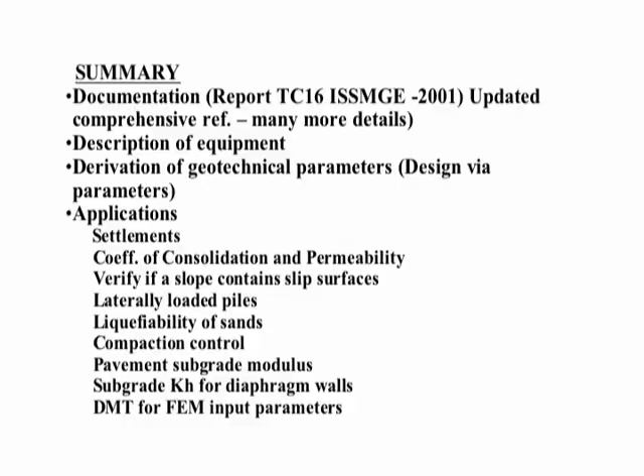Then we shall talk about the specifics of some applications, in particular settlements, which is probably the application number one of this tool. The coefficient of consolidation, permeability, to verify if a slope contains slip surfaces, laterally loaded piles, which is the original reason why this instrument was conceived. We shall talk about the liquefiability of sands. I think we have today quite a heavy contribution on liquefiability, and this will be presented by my colleague Monaco and by Professor Maugeri tomorrow afternoon. There is a paper in the proceedings which is more or less a state of the art of what we know today about evaluating liquefiability of sands by DMT.

A few words about compaction control, about pavement subgrade modulus to check the compaction of the subgrade under pavements. Something about the springs for diaphragm walls, because of course when you have to design diaphragm walls, you would like to know what springs you have to use, and this is a contribution in this direction. And then we shall say a few words about if and how DMT can help for selecting finite element input parameters.

Key references, I think most of you already know, but the important standards are the Eurocode 7 and the relatively recent 2001 ASTM standard.

As manuals, I remember the first manual that we made in Gainesville with David Crapps, that was in '81, which is now absorbed by the later manuals. Also, Dr. Schmertmann made a very heavy contribution in 4 volumes, which are not easy to have available, but are a very good source. But much of the material of all these manuals has been transplanted into the TC16 report.

The last 3 with the arrow here are perhaps what we still have to use today. Maybe the last 2 in particular. All of them are anyway in this bibliographic site that I started 3 or 4 years ago, and from which you can download almost anything, in particular these 3, and these 2, because I think this is really the basic reference.

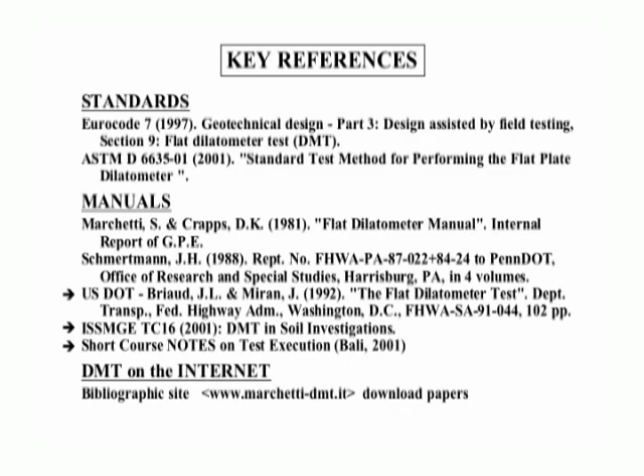But if you want to have details on instrumental details, you can go here. This is like a manual containing many details on the mechanics of the instrument, but we don't want to go into these details this morning. But if you're a user, this can be quite helpful.

And when the two things are equal, the membrane lifts and the contact is no longer a contact, and you take the pressure reading this time. Then you inflate and take the pressure reading when you have inflated 1.1 millimeter. Maybe I can tell you the story of the 1.1, but anyway, this is the way it is today.

The push force can be provided most efficiently by a penetrometer or by a drill rig, which however are not so effective, or almost any other equipment, because the test is not pushing the soil, but dilating the membrane. So you can more or less install with every possible method.

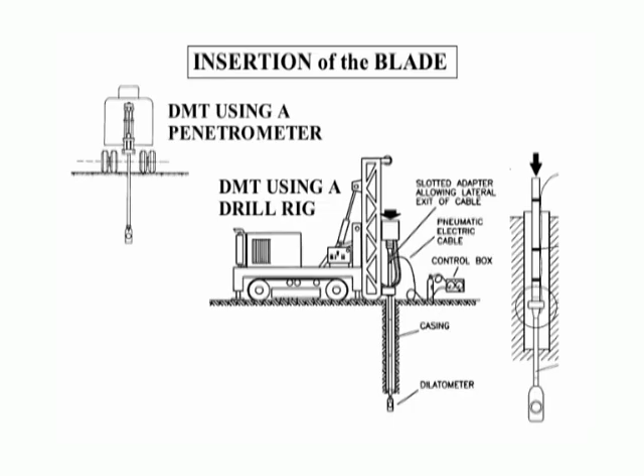As I said, the most effective way is using a penetrometer, possibly a 20 ton penetrometer, in which case it's better to have stronger rods than the typical 36 millimeter rods, because otherwise you have 20 tons but you have to stop because you're in danger of losing your instrument. I've seen many people having a 20 ton truck and then they stop because of the rods. So we prefer to use 43 millimeter rods, very strong, so we can apply all of the 20 tons.

Otherwise, you can use the push force of a drill rig. And sometimes, this is what we prefer, when we have a drill rig, we use the torpedo configuration, in which the idea is to avoid threading the cable all the way in the drill string, but only in the last, say typically 3 meters. Then the cable exits laterally and goes up in the annular space between the rods and the casing.

Here you have some pictures. It's important to have a collar, a slotted collar, through which the cable can go, so it can be protected in case there is some contact with the casing. As you can see, this is actually a 6 meter torpedo. As I said, it can typically be 3 meters, but in this case it was 6 meters. And then the cable exits laterally here. So you pre-assemble the thing beforehand.

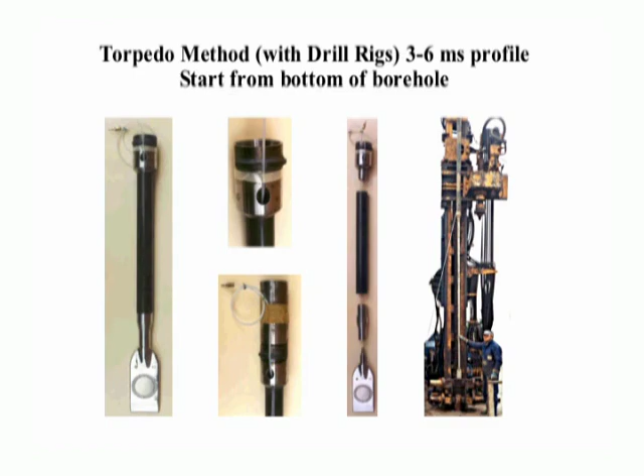It's like an SPT, and you attach it at the bottom, at the end of the drilling rods, which of course are more robust than the torpedo, because the torpedo typically is 36 or 50 millimeter diameter. The drill rods are typically 3 inches. So buckling is less of a danger.

Of course, by this method, you get every time only 3 meters, a stretch of 3 meters of profile. Then you have to clean the hole, extract the tool, clean the hole, advance in the penetrated soil, and start again from the bottom of the borehole in the virgin soil to make an additional 3 meters of testing.

This particular method is a necessity when you are at sea, because, as I just said, you can push on the drill rods, which are rather robust, and this can avoid buckling, but then all the force goes to the torpedo, which is smaller in diameter.

The soils that can be tested by DMT practically are all the penetrable soils. Often the limitation is not the DMT itself, but the push capacity, because the blade itself is very strong and can withstand more than the capacity of common trucks. Since the method of measuring is the balance of zero, the resolution is quite high and depends on the resolution of the pressure gauges, really.

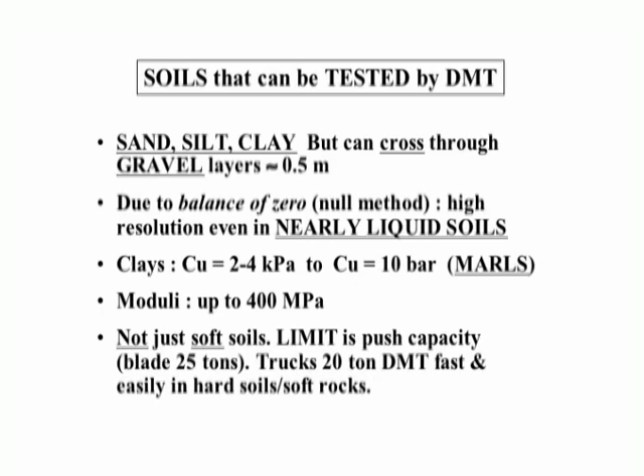So we can get results even in nearly liquid soils, which means that in clays, CU values can go from nearly liquid material to nearly marl, and the moduli up to this value indicated here. Of course, gravel is not welcome. Sometimes if the gravel does not tear the membrane, you can cross half a meter, even 1 meter of gravel, without taking readings, because readings have significance only if the soil particles are a small fraction of the diameter of the membrane.

Most of you probably are familiar with this picture illustrating the working principle. I don't want to go into details. I just want to say that everything here is mechanical, so the operator cannot calibrate or adjust anything. He cannot make any damage or personal touch.

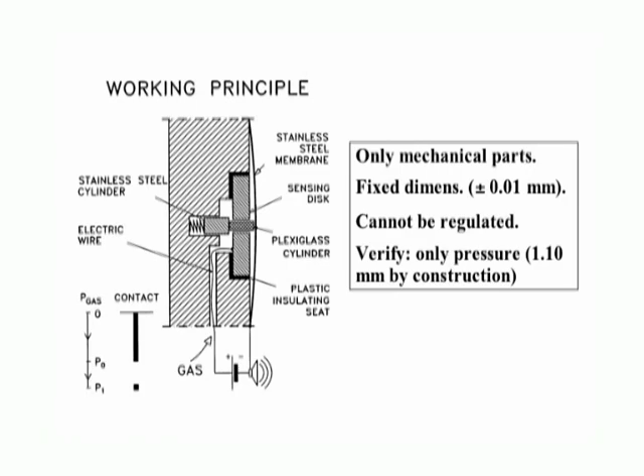There is no way that it cannot get 1.1 millimeter. So, as I said, the dimensions are fixed. 1.1 is the difference between the height of this plexiglass cylinder and this sensing disk. The difference is exactly 1.10 millimeter. So the extension, the movement of the membrane, is very well defined.

This is important because from the verification viewpoint, when you need to verify or make quality controls, you just need to verify the pressure measurement, because the only measurement is pressure. There is no way you can get out of calibration for the settlement, for the deformation of the membrane.

Often, I don't know in this country, but in our country very often bureaucracy requires that when you use pressure gauges you send them to universities to calibrate, which is a very ritual situation. In our case, since we have two gauges, one checks the other, and this is a sufficient check. We never had problems with the two gauges.

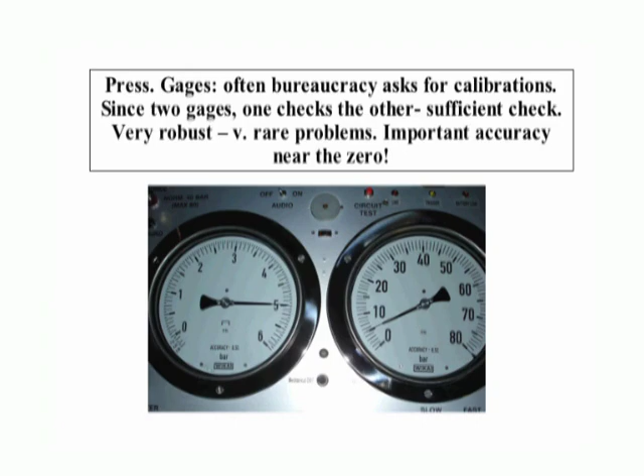So if the second reading is within a few percent from the first reading, you are right, and in my opinion, the calibrations that might be asked by the bureaucracy are superfluous. What really counts is the accuracy near zero, and not really the accuracy, because even some nonlinearity is not important at all. What is important is the resolution and the repeatability, not the accuracy.

But all these are already built in, because as you see, the initial part of this gauge is exploded here, so the reproducibility and the resolution are very high. So many of the problems behind this are not seen by the operator, by anybody, because they really do not exist. So the calibration can be done, but I think it's just for bureaucratic reasons.

Reproducibility of the DMT is, everybody who has done a DMT knows that it is very reproducible. Even more than reproducible, I would say independent from operator. One of the things I have always disliked since the beginning of my career was when I got results from some in-situ test I don't want to mention, and people told me, but these are made in a country in which they are not so accurate. So if it is a moving target, no good. So I think every operator should get the same results.

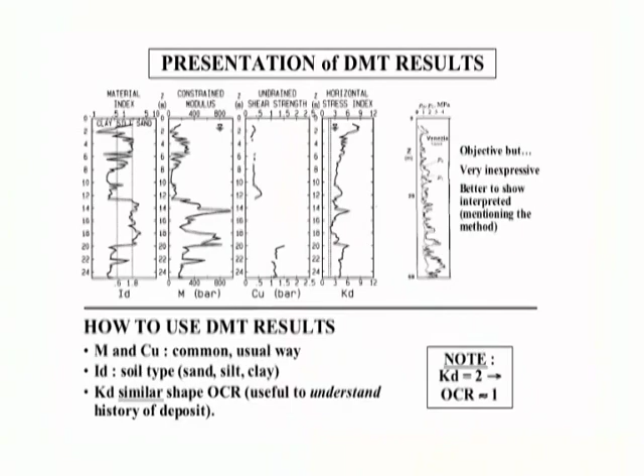So though KD, which is correlated to OCR, is not used directly in normal foundation calculations, however, OCR, we know, dominates soil behavior. So since KD is very similar to OCR, this parameter gives you a look at the stress history.

Some people prefer to display these results in this way, which is only P0 and P1. I strongly dislike this way of presenting the results, because they say it's objective. It's true, this is objective, this has no interpretation, but it's completely incomprehensible for anybody. It's like if you gave the results of the oedometer without showing the curve - more objective, but

inexpressive. I think a proper way is to show it this way, maybe even adding P0, P1 if you want, and of course stating the method by which you have interpreted P0, P1.

How to use the results? M and Cu we use in the common usual way. ID soil type is nice to know if the material is sand, silt, or clay. Though this is a nice extra, the tool was not done for this. As I said, KD has a similar shape of OCR, and it's important for some applications that we shall talk about later to keep in mind that KD equal to 2 means approximately OCR equal to 1.

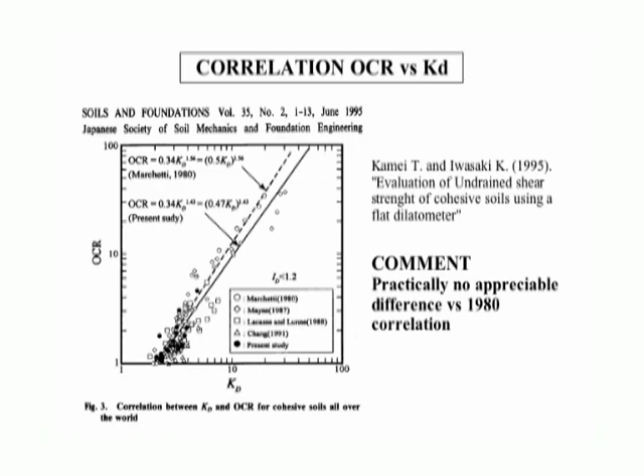Well, actually, this collection of OCR results made about 15 years after the initial 1980 correlation by some Japanese, and they found, collecting all the available OCR, a line which practically was coincident with the previous line. So what this slide tells us is that subsequent research has found that the initial correlations were essentially adequate.

This has some interest because it's a comparison between the curve that we have just seen in the previous slide, obtained by calibrations, OCR, KD. But here we have a theoretical prediction made by Finno, quite some time ago, by a strain path method and the anisotropic bounding surface model, which is a model I don't know if you are familiar. I'm not particularly familiar with that. Anyway, he found these bars here from his theoretical study.

So this is a case in which, again, sometimes the calibration is the most expeditious way when the mathematics is not ready, provided, of course, the physical link is there. So this is a confirmation by theory of something that was calibrated in absence of the theory before.

These are CU by DMT, which is the continuous line. These are CU by, let's say, high-quality triaxial samples, because this was Kiso-Jiban, which is one of the biggest firms in Japan. And frankly, my opinion is that if there is this scatter, this is the scatter of the triaxial, not of the soil. But anyway, the general agreement you can see is correct.

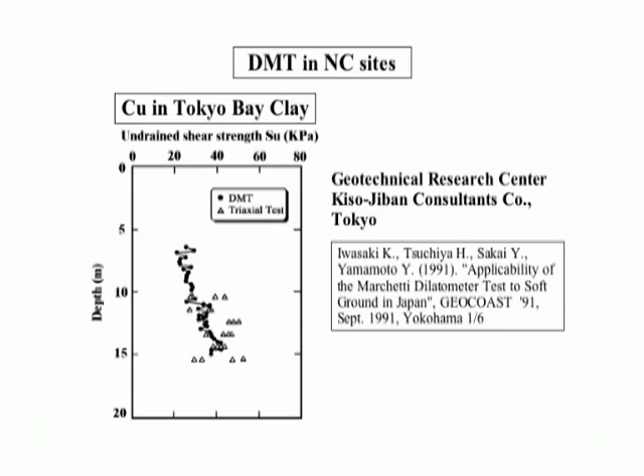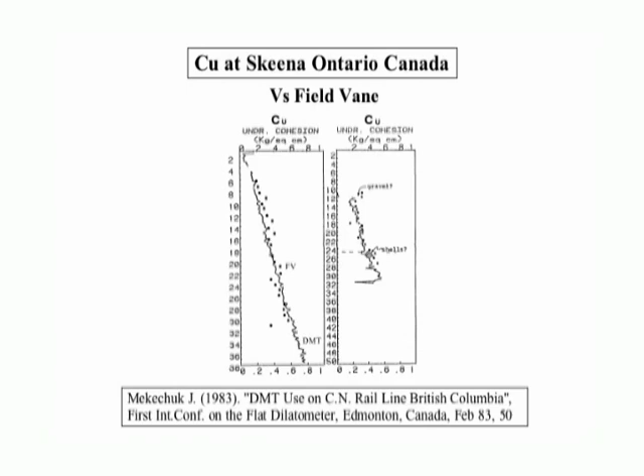Maybe I have not mentioned, but all these black lines representing DMT have always been interpreted in this context by using the 1980 correlations. So there are no adjustments or corrections, always with the 1980 correlations, which give you just one value of CU. Next.

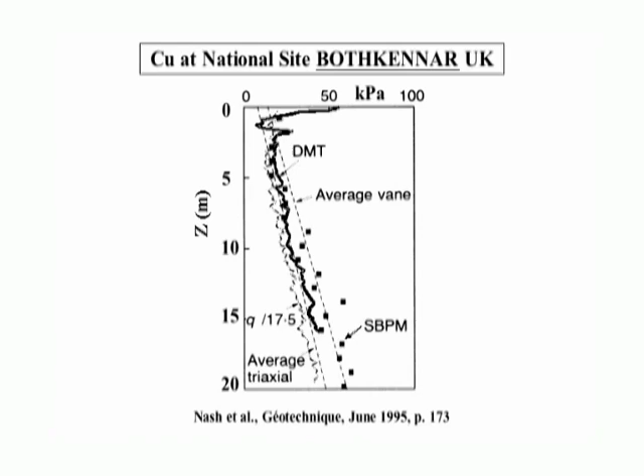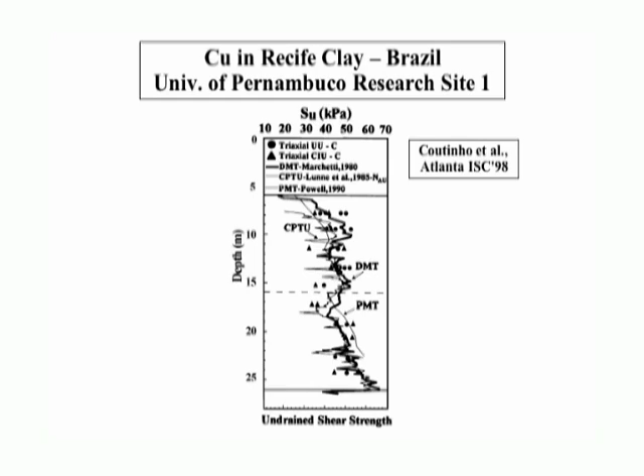When you want to check things, you have to go to different places. So these are results in other places between vane and CU, and again the agreement is good. And here is our friend Roberto Coutinho, who did this test in one of his research sites. And again, DMT is in agreement with other results he got.

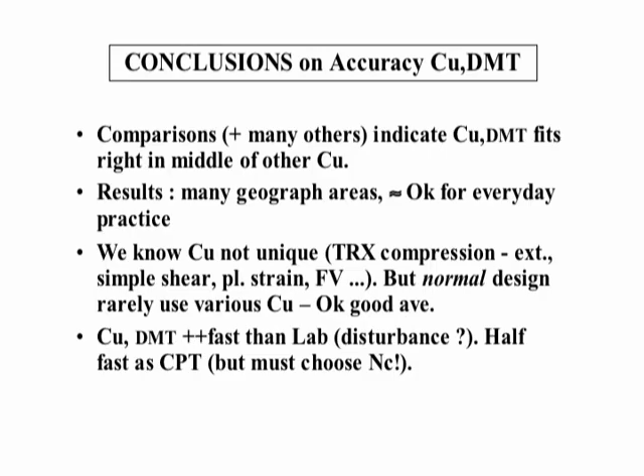So the conclusion on the accuracy of CU is, and many others indicated, that generally CU is okay for everyday practice and works in many geographical areas. Of course, a purist could say that we know that CU is not unique because we have triaxial compression, extension, simple shear, plane strain, field vane. But how many of us use more than one CU in everyday design? So we think that having a reasonably accurate CU value is already something.

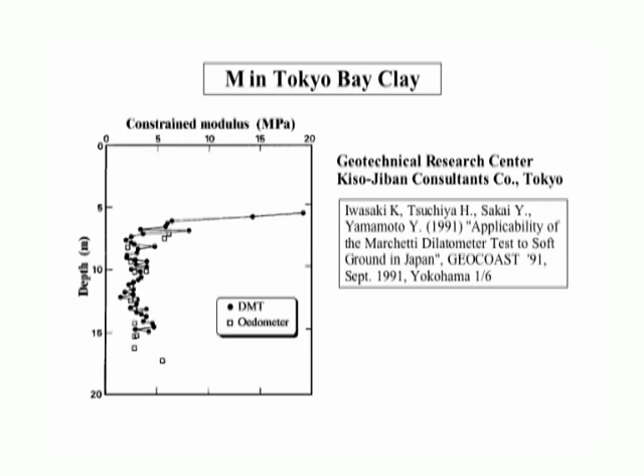This agreement by the same people at the Kiso-Jiban firm. These are the results in another clay.

Now, what we think is the most useful DMT application is the settlement. And what we recommend, or what we use at least, is the one-dimensional method in which you have M given by DMT. So you have no choice if you use this method. And the delta sigma V by Boussinesq. Again, you have no choice because Boussinesq is Boussinesq. And this is the formula, the one-dimensional Terzaghi formula.

If you really want, you can use, of course, the three-dimensional formula, Hooke's law. There is a relation, as you know, between Young's modulus and constrained modulus, which from typical Poisson ratio values gives about 0.8. But you get similar predictions because this is lower, but then you have to detract something. So this formula and this formula are nearly equivalent so far as the quantity you obtain.

But the point is this formula is simpler, not just for simplicity, because you cannot play games with the results. Here you can have a different Poisson ratio. You can have this conversion with a different Poisson ratio. We also know that the horizontal stresses are not so well predicted by Boussinesq.

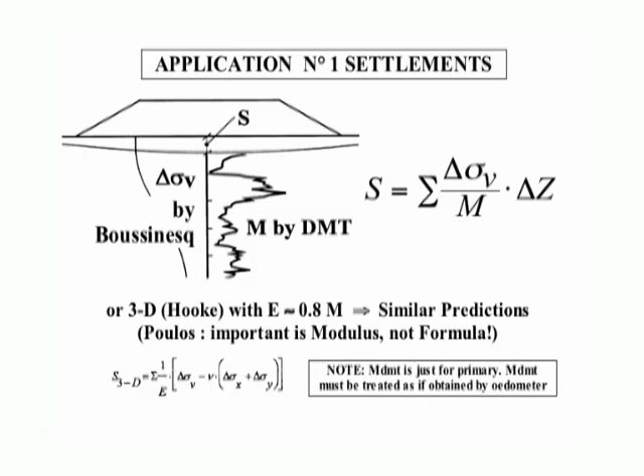One note, this settlement does not include secondary. As was stressed in many previous documents, MDMT is just for primary, because of course during the test you have no time for secondary. And so MDMT must be treated as if it was obtained by oedometer.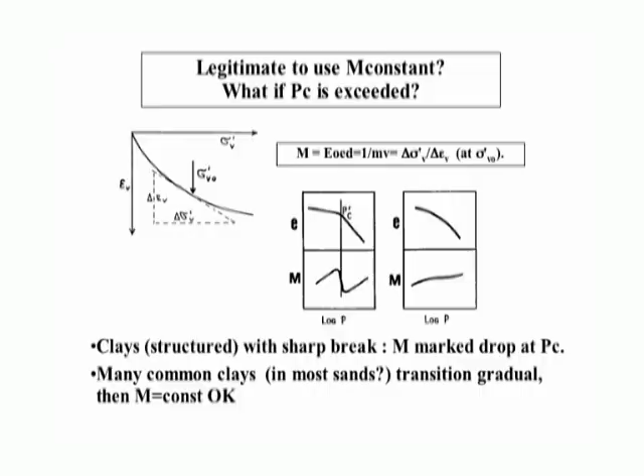Now a question can be, is it legitimate to use M constant in the settlement analysis, because as we know, M is a variable, is not a constant during loading. M is defined here, is 1 over mv, but is at the vertical overburden stress. And we know that if we have a sharp break and we are exceeding PC, M has a sharp drop and then starts again. So can we really use a constant value of M?

Well, this situation with a very sharp break is generally so sharp in some structured clays, some Scandinavian clays, but in many clays may not be so sharp. And probably even in most sands, there is no such break. So the transition is more gradual. So in many cases, this break is not so marked, and the transition is more gradual. And in practice, we can use M in many cases.

As I remarked in the previous slide, Poulos clearly said in Istanbul something we all know, that what is important is not the formula, but the modulus. What is important is to have a modulus which is not 3 or 4 times wrong. This is important. The rest, the formula, is not so important. And even accepting that this can be considered a constant is not so terrible compared with errors that you can make by different methods.

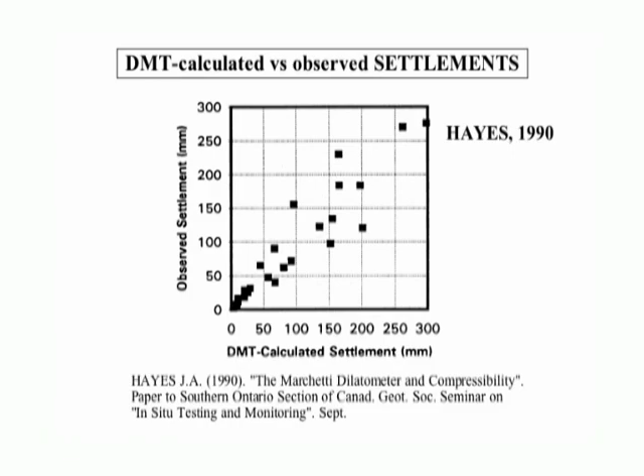I don't show, of course, case histories here because, for many reasons, we have no time, but there is a specific paper in this conference that has collected quite a large number of predicted versus observed settlements, a review of the available experience by Monaco and other people of our group. So if you are interested in comparison between predicted and observed settlement, you can go to this paper in the book of this conference.

We might wonder why it appears that the DMT is better in getting settlement than other tools. Well, Jamiolkowski, as far as the ratio Young's modulus over QC is concerned, found in the calibration chamber quite a high variability, between 2.5 and 25. And this was a function of OCR. But of course, the question is who will give us OCR? Because if we just have QC, we cannot use at the same time QC to infer OCR.

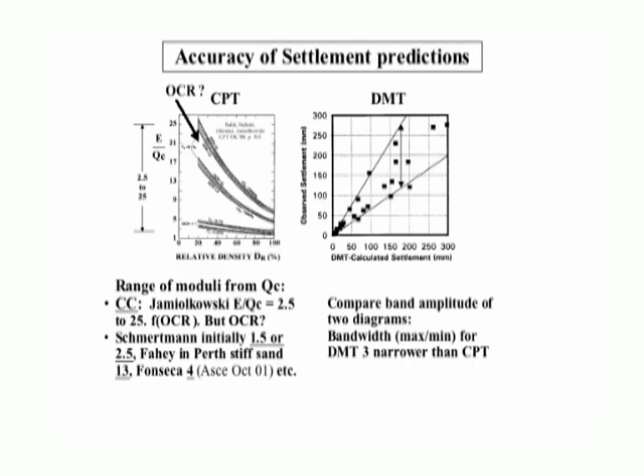Here the bandwidth of maximum to minimum prediction, these are settlements really, not moduli, but anyway it is the same thing, is much narrower. This is another slide presented by two persons who are in this room, Bullock and Failmezger, and they showed again the predictions made by SPT and by DMT, measured versus predicted. You can see a much larger dispersion by SPT than by DMT. Sometimes people say there is a lot of experience with SPT, but even if you have a billion measurements, this is not going to reduce the variability.

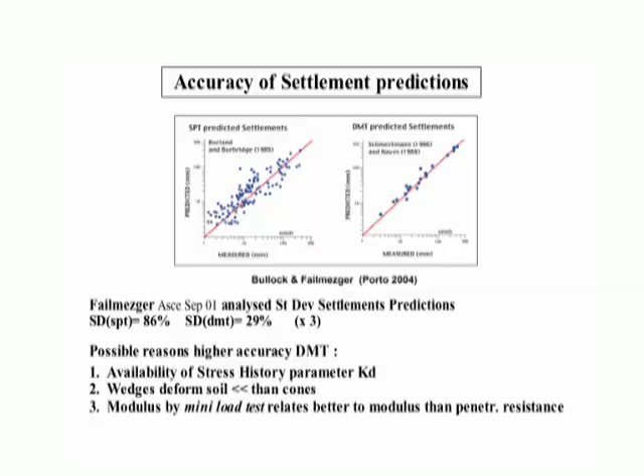Possible reasons for the higher accuracy of DMT, we think, are first of all, in my opinion, the availability of the stress history parameter, KD, which is connected to OCR. Stress history is very important to control settlements. Then, of course, a wedge deforms the soil less than a rupture test. And then the modulus by a mini load test relates better to modulus than a penetration resistance, because actually what the DMT does is like a lateral embankment against the soil. So this is more similar to a modulus than the penetration resistance.

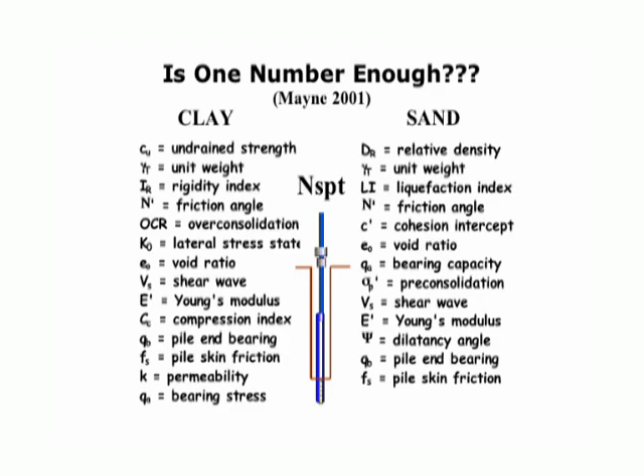This is a very nice picture that probably Paul may recognize. Is one number enough? Because in 2001 he said, we measure SPT, and then from this we want to obtain the shear strength, the modulus, skin friction, etc. So one number is not very much, of course. Actually, we should have 36 numbers, because a stress has 6 components and strain has 6 components, a 6 by 6 matrix of 36 parameters, which vary as you load. But 36 is not so easy, but one maybe is too little.

DMT is a 2-parameter test, and permits some elementary form of combination in which you get MDMT, as I said before, correcting ED obtained by theory of elasticity by soil type and KD. And here, this line emphasizes that one of them is stress history. And as was mentioned by Jamiolkowski in one of the penetration conferences in '88, without stress history it is impossible to select a reliable modulus, E or M, from QC. So stress history is fundamental.

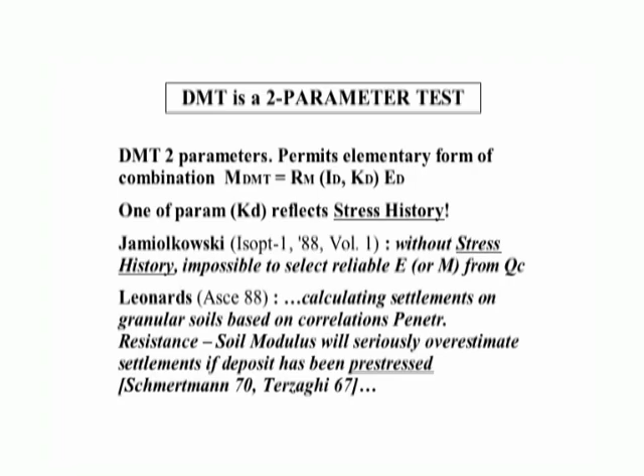And also Leonards: calculating settlements on granular soils based on correlations between penetration resistance and soil modulus will seriously overestimate settlements if the deposit has been prestressed. So prestressing has a fundamental role in reducing settlements. Therefore, it must play some role when you predict settlements. So having a modulus which incorporates the effect of stress history is in the right direction.

We have seen many times this picture, but remember this is now more than 30 years old. These photographs were done by Baligh and Scott, and were in the clay, in the real thing. They are not numerical models. This is the real clay, and we have both cases. We have distortions, but you see that here we have something like a clay juice in the place where you usually put the porous stone for dissipations.

And we know what the soil does when you make clay juice. Well, this is a classic, a particular case of the Leda clay, but you know that the Leda clay, you can put a lot of weight on it, but if you make something like this, then you can put it in a glass. So this is okay for rupture, but when you're looking for deformation or stiffness, perhaps you are in a better condition if you are loading a bulb of soil here, which is distorted, but not in a way comparable with this one.

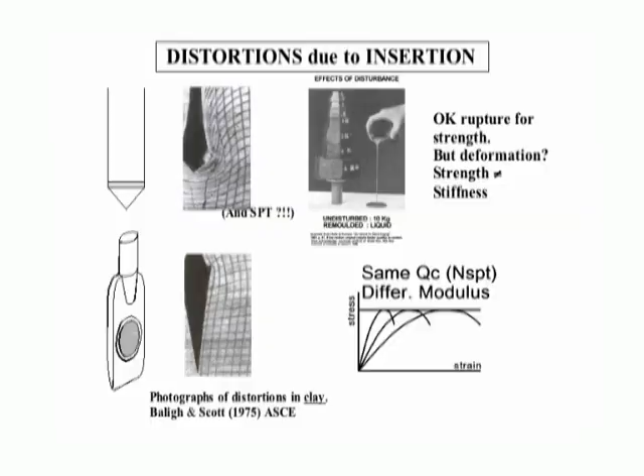And this is a picture that was also by Paul Mayne. He insists with his students that of course deformability or stiffness and strength are not the same thing, they are two different properties. You can have in the stress-strain curve the same strength, but you can have a different slope for reaching that strength. On the other hand, this is like steel. All steels have more or less the same modulus, but the strength can be much more different. So these are two different properties. So strength is one thing, deformation is another thing.

Another thing I want to clarify, maybe not here in this audience, but sometimes many people confuse the DMT with the pressuremeter. So I think there are considerable differences. I like penetration testing for reasons I already mentioned. The operator cannot make damage, because you have to make PMT in a pre-drilled, calibrated, this is a terrible word, in a calibrated hole. Now, if you are in clay, you may have a calibrated hole. What is a calibrated hole if you are in sand or with water, etc.? So the big difference is that the operator can do damage. Not only the operator, maybe the soil itself does not permit to have a very good hole.

And another point is what you do as a first action in a pressuremeter, you destroy the horizontal stresses, because when you make a hole, the horizontal stresses are reduced to 0, which is a trivial number that you cannot use. When you penetrate with the DMT, you increase the pre-existing horizontal stress, but at least you can make a correlation because you have something which is not trivial. So you can go from KD to K0 and these kinds of things.

I think with all cylindrical probes, you have this problem. And again, though I'm not familiar, I think with the cone pressuremeter, one of the reasons why it did not go very fast is that in this zone you are behind this parasitic ring. But of course, we don't want to go into this.

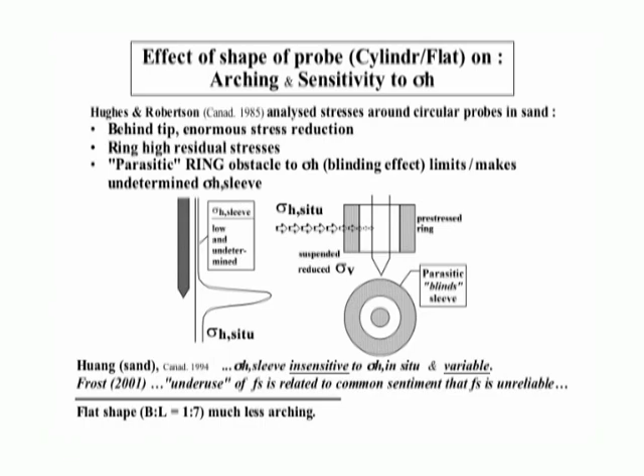I just want to conclude here that a flat shape implies much less arching, because the cross section of the DMT is about 1 to 7. For instance, would you ever make a tunnel with the shape 1 to 7 vertical to horizontal? Never, because you would not have arching. So you try to have it circular or elliptical, but never of this shape.

So we think it is reasonable to assume that with the flat shape, you avoid the problem of arching that we have just seen. Often DMT has been used for before-after. DMT before-after is used to control compaction, because of course when you compact you increase the modulus.

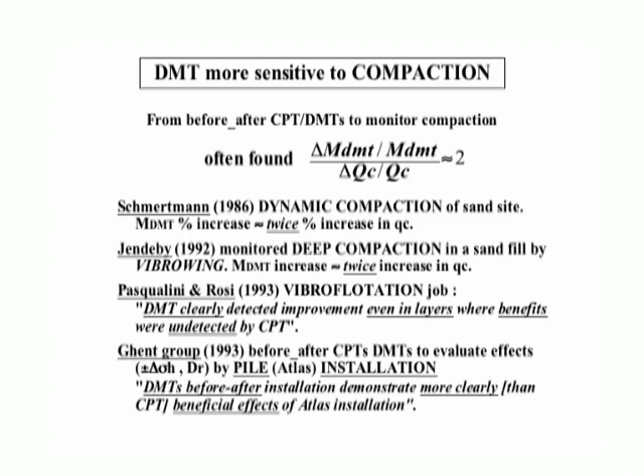DMT has been found to be more sensitive to compaction than other tests, because many researchers have observed that when you compact you have an increase both of QC and DMT, but DMT increases at a faster rate. So if the increase in QC is 10%, you find that DMT increases 20%.

Schmertmann found this in 1986. There is an important paper from him, dynamic compaction of a sand site, and he found that the increase in M was about twice the increase in QC. These people in Scandinavia found a similar result. This found similar results, and the Ghent group also, studying the effect of the installation of Atlas piles, noted that DMTs before-after installation demonstrate more clearly than CPT the beneficial effects of the Atlas installation.

So we think, as Roger said before, that it is important that DMT is more sensitive to even delicate effects in the soil. Well, this more or less repeats the previous slide. It shows that before compaction, you have a QC and an MDMT, let's say. After compaction, both increase, but QC increases a little, MDMT increases a lot.

And the ratio of this to this also increases, because before compaction, when the soil is nearly normally consolidated, you have a ratio of 5, 6, 7. After compaction, when you have imparted stress history to your soil, this can be 20, 25.

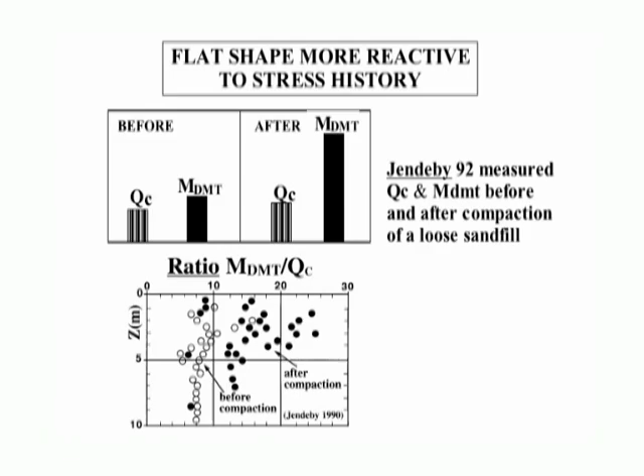Using DMT for compaction can have some advantages, because since QC is scarcely sensitive to sigma H, QC reflects only part of the benefit and does not reflect the increase in delta sigma H. And according to Massarsch, the settlement predicted by QC after compaction can be too big. The consequence is we compact more than necessary.

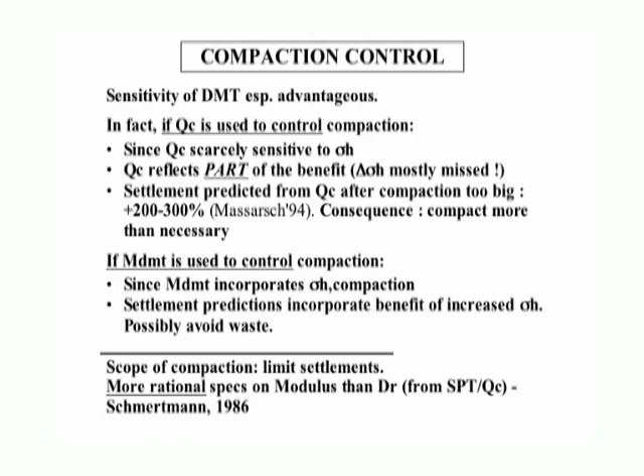If we use MDMT to control compaction, since MDMT incorporates sigma H, the settlement predictions incorporate the benefit of increased sigma H. And in this case, we could possibly avoid waste. In other words, by DMT it seems that we can feel the advantages of increasing sigma H. So it is a more direct link to the settlements.

And I think a very appropriate observation by Schmertmann in '86 was: why do we compact? We compact to limit the settlements. So it is more rational to write a specification in terms of modulus rather than DR. What has DR to do with our scope? The real scope is to limit settlements. If you want settlements, go directly to modulus, rather than pass through relative density.

We have seen two slides ago that the ratio MDMT over QC during compaction increases from 5 to 10, let's say, to 25 to 30. Now, during compaction of a loose sand fill, this ratio alpha increases, but compaction means imparting OCR and stress history. So alpha is usable as an approximate indicator of OCR.

This could be one of the few ways to estimate OCR in sand, because when we find a value of alpha of 5 to 10, this means normally consolidated sand. When it's in the other range, it means overconsolidated sand. And of course, from OCR, we can also have an indication of K0 in sand.

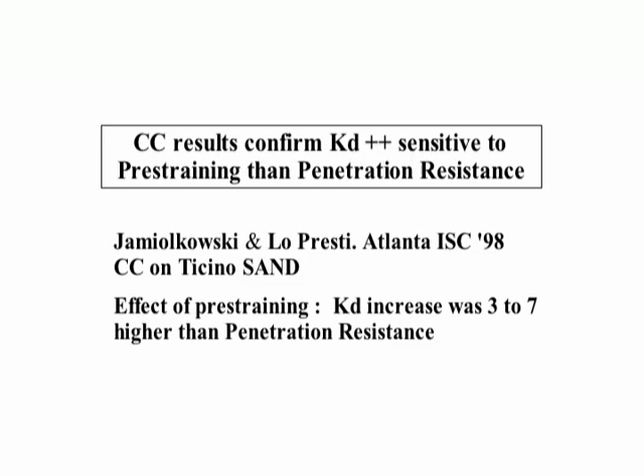They show essentially that if you pre-strain the sand in the calibration chamber, KD increases much faster than penetration resistance. Pre-straining is an effect not easy to detect by other methods. It's like aging, more or less - a tenuous form of aging.

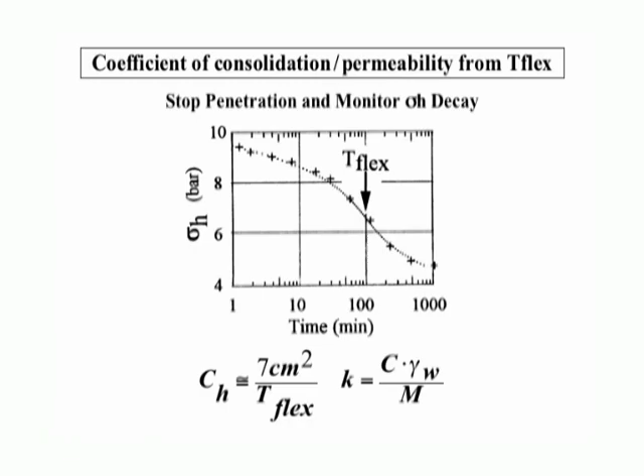This number 7 was obtained again as a number connecting to theory, because the theory is missing for what you want. The theory actually exists, for instance, for the pressure meter, the holding test - you know the holding test, and Anderson developed the theory for the total stress decay. But DMT is not circular, it could be elliptical, so the theory is not available, but a number exists. If the theory becomes available, perhaps we shall have a different number, but the two things are anyway connected.

In conclusion, this is another application in which, when you make a dissipation test, you can get CH and K. I must say, however, that this test takes longer than with the CPTU, so it's rather expensive because nobody wants to stop just to make a test like this. Unless you really have a good reason to do it - we think this is quite accurate, but it can take 1, 2, 3 hours, whereas with the cone you can do it frequently in much less time. So from the viewpoint of time, this is something we try to avoid, but in many cases where you need accurate values, we use it.

Just a few words to inform that on this 90-kilometer road in Bangladesh, we used the DMT as an alternative way to check the compaction that was initially specified in terms of CBR, Proctor, and E-plate. As an alternative to the initial specification, an acceptance DMT profile was developed, and it was used as an economical production method for quality control of compaction with only occasional verifications.

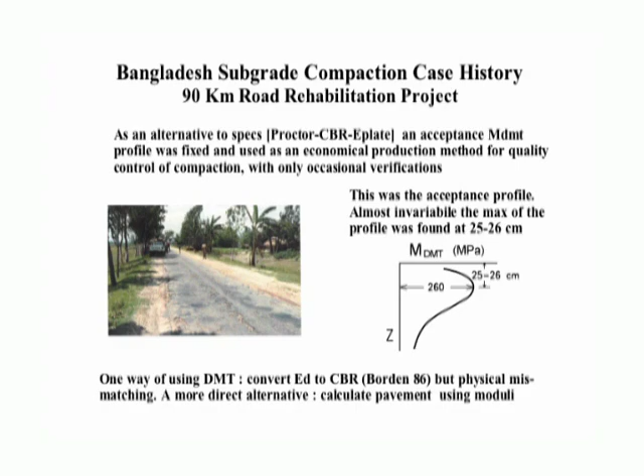But apart from this, I found very interesting the shape of the profile of M that we found below in the compacted soil. Almost invariably, in 60 profiles we made, the maximum was always at about 25, 26 centimeters. This is reasonable because here the high horizontal stresses cannot be sustained by the soil, so it's intuitive that there must be a maximum at some depth.

But this is a very nice shape, because when you do E-plate by plate loading, you just get one modulus, but it's an integral modulus. In this way, you have a profile of the modulus with depth. Some colleagues who are experts in pavement design say the tendency today is to calculate pavements using moduli rather than tests like CBR, so maybe this is something they have to tell us. Anyway, this way we can provide them some kind of modulus with depth.

How to use DMT for finite element input analysis? Of course, the easiest way is to use the modulus, MDMT or Young's modulus, plus linear elasticity. Many people use this, and that's it.

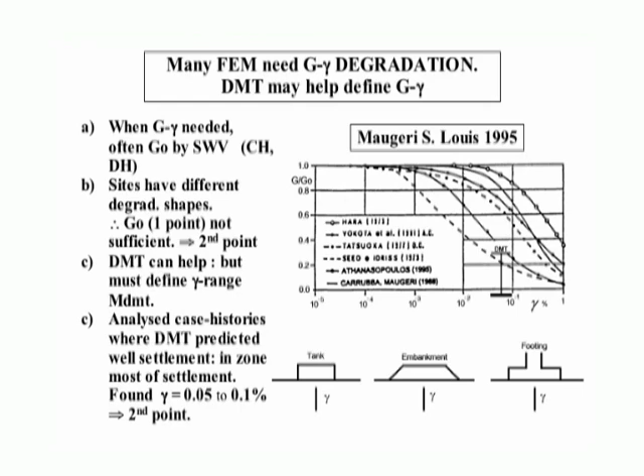We can have a second point provided we know to which range this M corresponds. We have analyzed case histories where DMT predicted well the settlements, and we found that in the zones where most of the settlements occurred, this value was 0.05 to 0.1% for the second point, shown here.

So this is an approximate, tentative way of finding the second point, of locating the second point in the curve, so you can then better choose the decay curve.

Even other researchers have given some idea of the shear strain they think can be associated with DMT, and one of these people was Mayne. He gave essentially the same range, a value in the range I indicated before. Also Ishihara, here you cannot read, but anyway, he mentioned a similar shear strain.

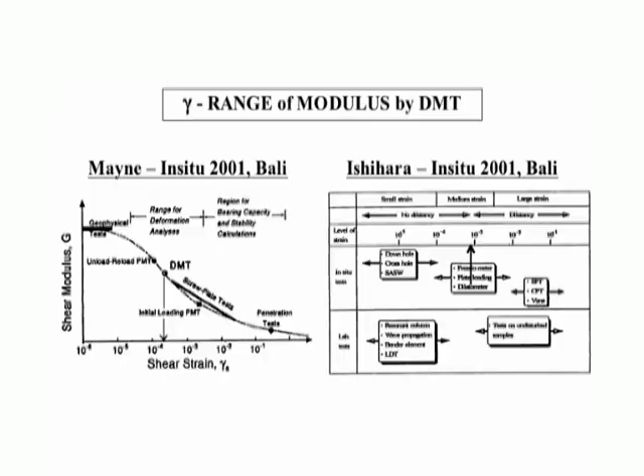I don't think these things come from measurement or any specific research, but anyway, it's their broad idea of where you could be, and it is good to see that it corresponds to the values indicated in the previous slide.

Here we have many researchers who have tried to correlate G0 to ED, probably as efforts to predict G0 from ED. They found some correlations, but of course today, since we also have G0, it's better to measure both.

So this was the stimulus to SDMT: to obtain G0 rather than by correlations with ED, to measure directly also G0.

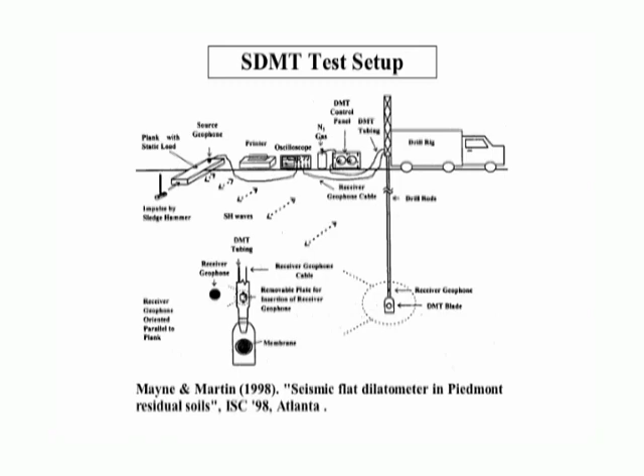This is a historical picture by Mayne and Martin in '98, in which they showed the initial seismic flat dilatometer test in residual soils. At the time, they were a little too far from the rods, but anyway, they had this idea, because the idea was to have at the same time G0 and the operative modulus.

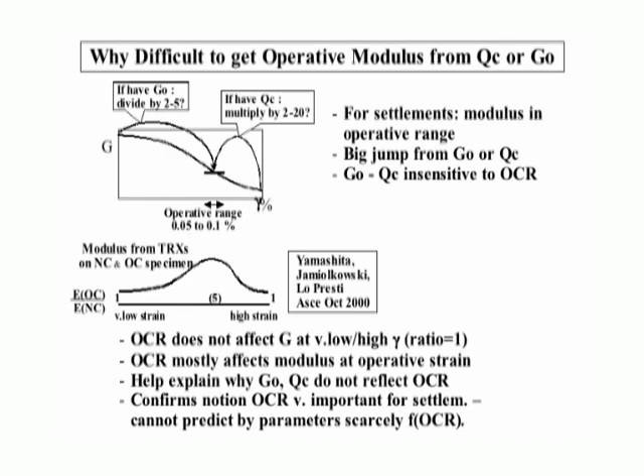So OCR affects the modulus, especially at operative strains. This is important, for instance, for settlements. We know that OCR is important, as Skempton explained us very well, and many others, that over-consolidation is an important factor at operative strain.

But when you are at very low or very high strain, OCR is not important for the modulus. This helps explain why G0 and QC do not reflect OCR, and confirms the notion that OCR is very important for settlement, and that you cannot predict settlements using parameters scarcely influenced by OCR.

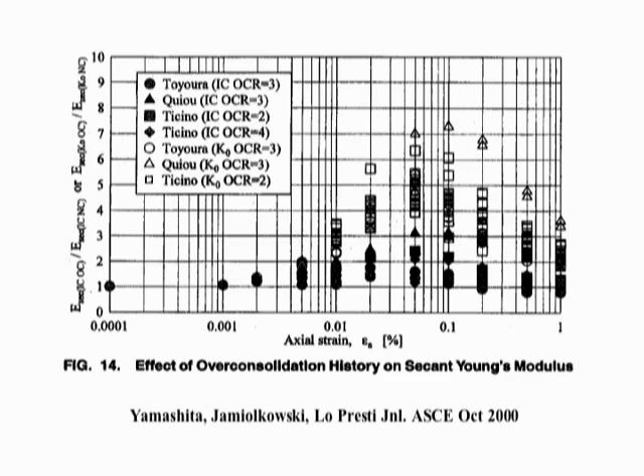This is the same picture, not very good, but it's from the original paper by Yamashita, Jamiolkowski, and Lo Presti. I think this picture, which goes back to Bishop 50 years ago, has something to do with that paper, because they showed at the time how changes in U and the A parameter during loading deviate with stress.

They found that at low strain, both behave in the same way. Delta U here and here is the same, and A is 1/3, like the theory of elasticity for both. So at very low strain, normally consolidated and over-consolidated soils behave the same. This we all know from this picture from the Bible of the triaxial test, Bishop. Only when the strain becomes significant does dilatancy show up, if it exists, and then there is a difference between the two.

So I think this old picture, after all, has something to do with previous research, and all of them, of course, reinforce each other.

In conclusion, we think the best applications of DMT are the M and Cu profiles, the most useful, estimating settlement deformation, monitoring soil improvement, recognizing soil type, verifying if slopes contain active old slip surfaces, and useful information on OCR and K0 in clay, coefficient of consolidation, permeability, and PY curves for laterally loaded piles.

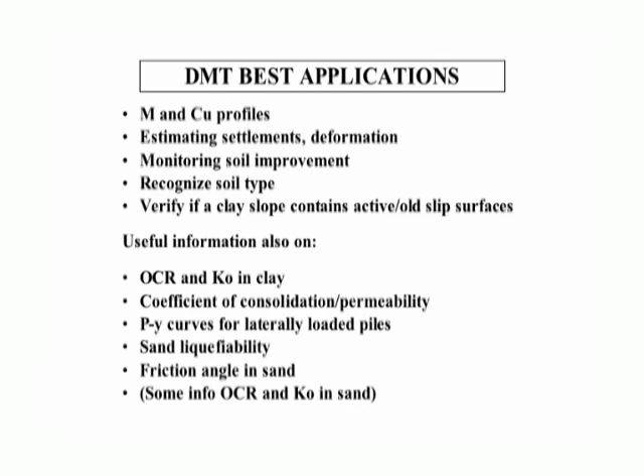Friction angle in sand is not the best thing that DMT does. It gives, we think, 2, 3, 4 degrees too conservative friction angle, but better than nothing in many cases. There's some information on OCR and K0 in sand in the way I said before, and I think it's the last one.

So if the purpose is to profile hard and soft layers, SPT or CPT may be preferable because they cost considerably less, but it depends on the accuracy you need. In many cases, you just want to know if the settlement is 1 centimeter or 10 centimeters. In this case, you can stay well with SPT, CPT. If you want more accurate settlements, then use DMT.

So the last two lines are: use DMT when settlements are important, if you have strict specifications, for instance by railway, or if you need to decide between piles or shallow foundations. I know Roger is very sensitive to this matter because he frequently says he has been able to replace initially intended pile foundations with shallow footings, with considerable savings.

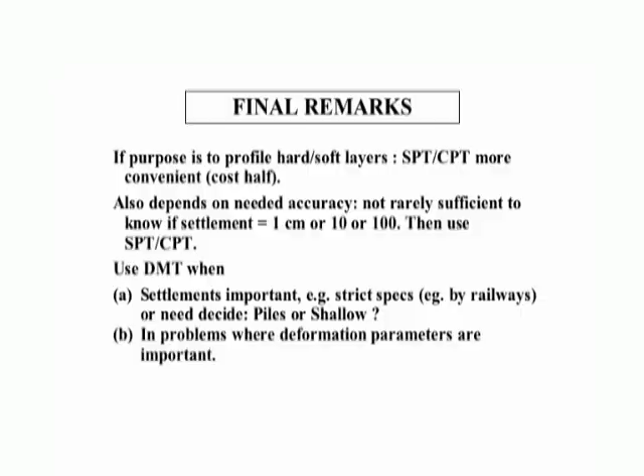So in general, we think DMT can be usable conveniently when the deformation parameters are important. I think this was the last one. Yes, thank you for your attention.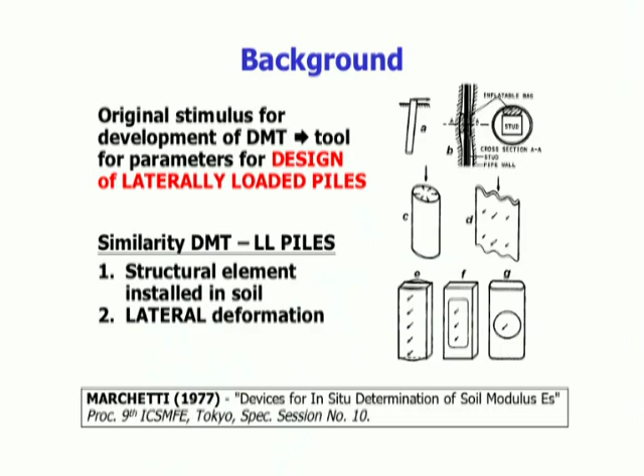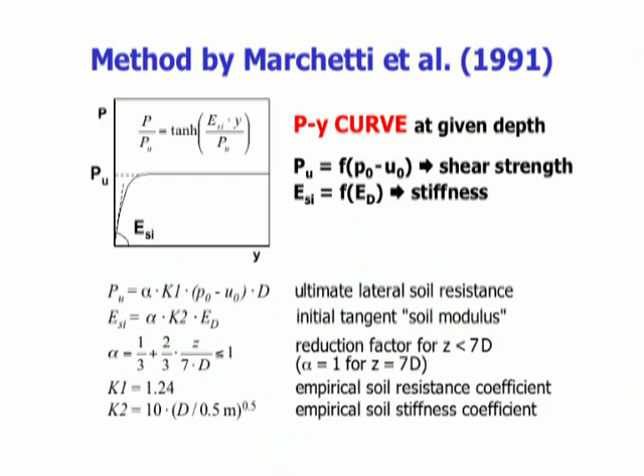K1 and K2 are two empirical coefficients that were derived from lateral load tests on full-scale piles in a normally consolidated clay site in Italy. It should be noted that the ultimate lateral soil resistance is strictly related to shear strength of the clay, because it is a function of P0 minus U0, the same expression that we use to derive the undrained shear strength of the clay. While the initial tangent soil modulus is strictly related to stiffness, because it's derived simply from the dilatometer modulus ED. So in this way, we think that we have found the best match between corresponding parameters representing shear strength at failure and stiffness in the initial part of the curves.

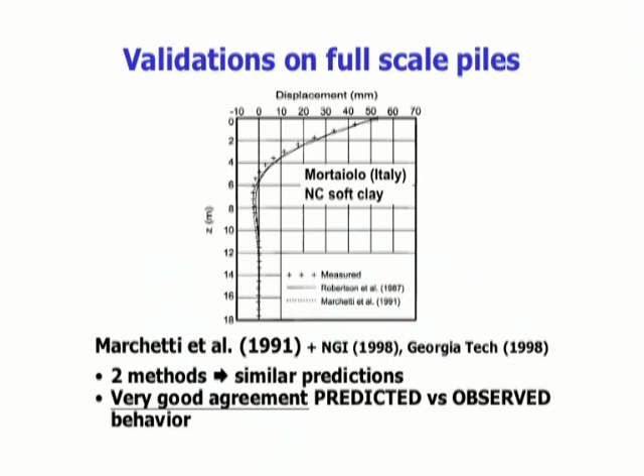Both methods, by Robertson and ours, have been validated on full-scale load tests on piles at various sites. The example shown in this figure was the comparison of horizontal displacement with depth measured by inclinometers and predicted by both methods in lateral load tests on full-scale piles in this normally consolidated soft clay in Italy. It can be seen that the agreement between measurements and predictions by both methods is quite good. In general, both methods give similar predictions, generally in very good agreement with the observed behavior. Similar information has been given also by other groups like NGI and Georgia Tech.

Some information on the use of DMT data for design of laterally loaded pile groups can be found in this paper by Ruesta and Townsend, where PY curves were derived from DMT and pressuremeter based on large-scale load tests on groups of 16 piles. So who is interested in this topic can refer to this paper.

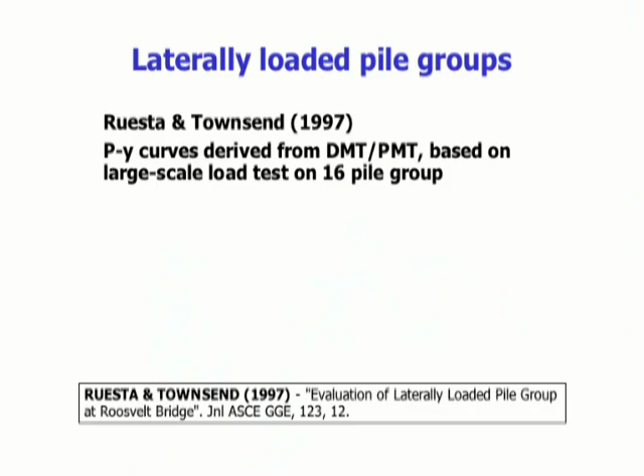I will now talk about the use of the DMT for design of multi-anchored diaphragm walls, in particular for the evaluation of the coefficient of subgrade reaction to use with a spring model for calculations. This kind of structure, multi-anchored or multi-propped diaphragm walls, is widely used today for retaining deep open pit excavations, for example car parkings in urban environments, often in combination with the top-down construction technique. Therefore, to calculate the structure, it is necessary to use methods that take into account the interaction between soil and structure. This can be finite element methods, or the old spring method, which in Italy is still widely used for calculation of diaphragm walls.

The spring method, of course, is simple to use but has several drawbacks. The most crucial step in applying this method is the selection of the coefficient of subgrade reaction in a rational way. This is very important because this coefficient is the only parameter defining the interaction between soil and structure with this model. This parameter is something strange, really. It's a hybrid parameter because it depends on soil modulus, but also on a number of geometrical and mechanical factors whose meaning is not well understood. In any case, engineers are familiar with moduli, with soil stiffness, and not with this strange coefficient of subgrade reaction. Therefore, even crude relations for deriving this coefficient from usual soil stiffness parameters like the constrained modulus may be useful to engineers.

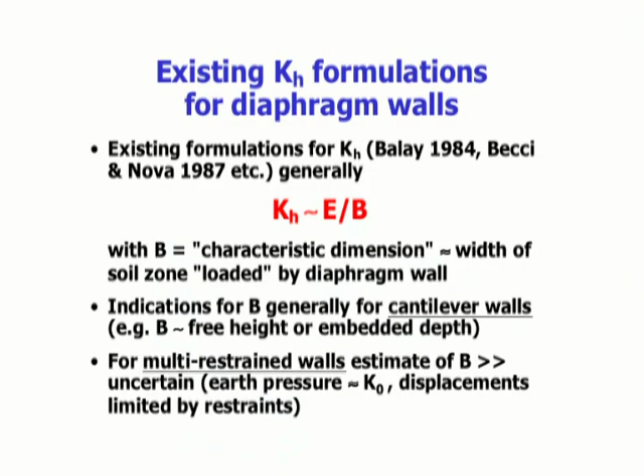In many cases, this width B is equal or proportional to the free height of the wall or to the embedded depth of the cantilever wall. The estimate of this dimension B in the case of multi-restrained walls is much more uncertain, because the earth pressure distribution may be significantly different from the one in the case of the cantilever walls. And many times it is much closer to the K0 distribution. And this is due to the fact that displacements are limited by restraint.

So I will talk now about some results that we obtained in a study that was presented in a paper at the Porto conference 2 years ago, where we tried to derive a tentative correlation between the coefficient of subgrade reaction for diaphragm walls and the constrained modulus MDMT. This slide summarizes the procedure that we followed to derive this relation. First, we made finite element analysis using Plaxis with soil input moduli estimated from MDMT, considering various combinations of wall soil stiffness, excavation depth, and prop spacing.

Then we repeated the calculation by the spring model by varying the coefficient of subgrade reaction until the bending moments and the horizontal displacements of the wall were nearly equal to values calculated by Plaxis. In this way, we could derive best fit values of the coefficient of subgrade reaction, those giving the best match with the Plaxis results. And we tried to establish this tentative correlation between KH and MDMT.

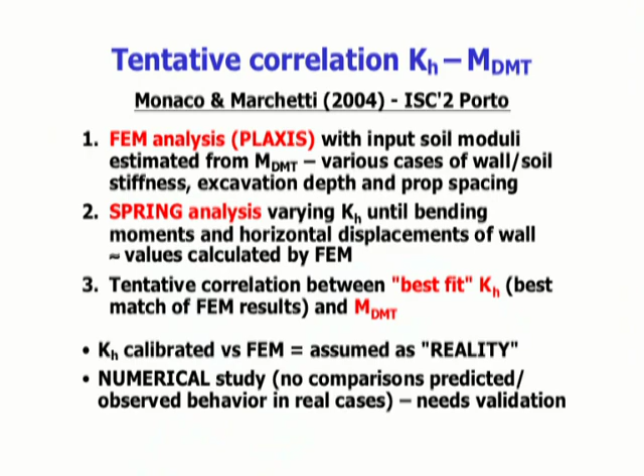I don't want to give many details about the calculation in this study. Who is interested can refer to the paper, but I just want to mention this. That could be an interesting point for the Plaxis users, how to select Plaxis stiffness input parameters starting from the DMT moduli.

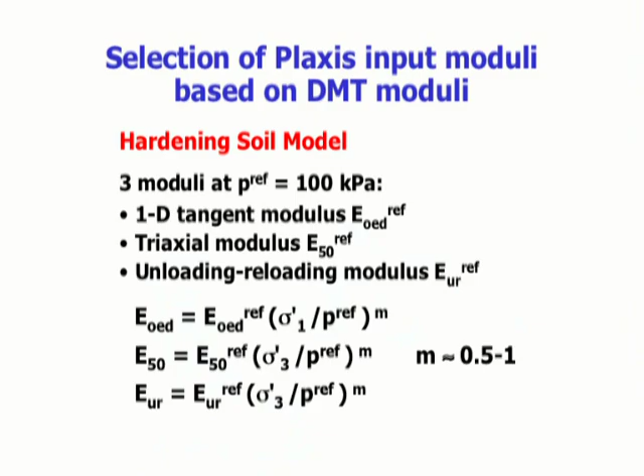In this study, we made use of the hardening soil model incorporated in Plaxis. And this model requires the definition of 3 moduli at the reference pressure of 100 kilopascal: a one-dimensional tangent modulus, a triaxial modulus E50, and an unloading-reloading modulus. And these moduli are related to current stress according to these expressions, where the exponent of the relation is usually varying in the range 0.5 to 1.

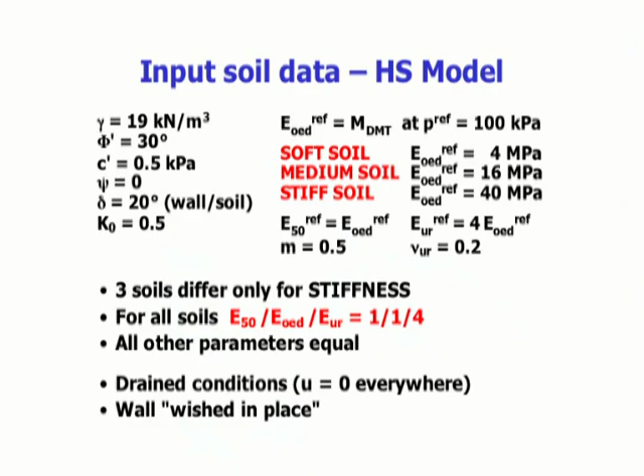So the calculations were done as a parametric study, so for a number of combinations. Three soils were considered, a soft soil, a medium soil, and a stiff soil, having different values of reference moduli. The only difference between the three soils concerns stiffness. All the other parameters representing shear strength were considered the same for all three cases. But in all three cases, the ratio between the three moduli required by the hardening soil model was 1:1:4, as I explained before.

This is just to recall some data for which the calculation was made, because we can maybe use some results of this study for similar conditions. We analyzed three cases of excavation depth varying from 12 to 24 meters, two values of prop spacing, 3 and 6 meters, and a fixed embedded depth. We also considered two extremely different values of wall stiffness: a rigid wall with a flexural stiffness corresponding to a 1 meter thick concrete wall, a frequent situation, and a flexible wall with the stiffness of a typical steel sheet pile wall.

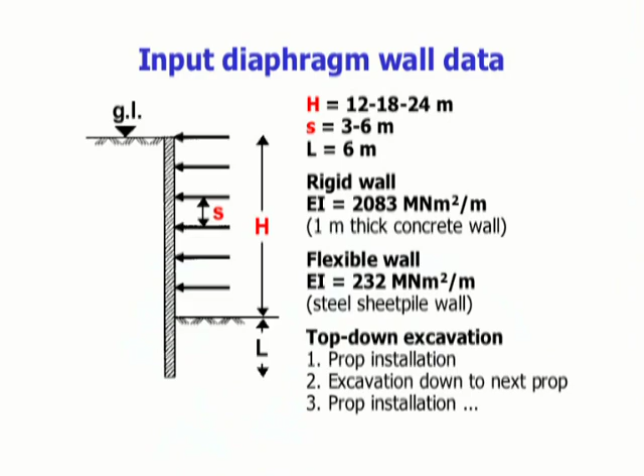And we considered the construction sequence according to the top-down technique. The first step is always prop installation, followed by excavation down to the next prop level, and so on until the final excavation depth. This technique involves a high degree of restraint of the structure.

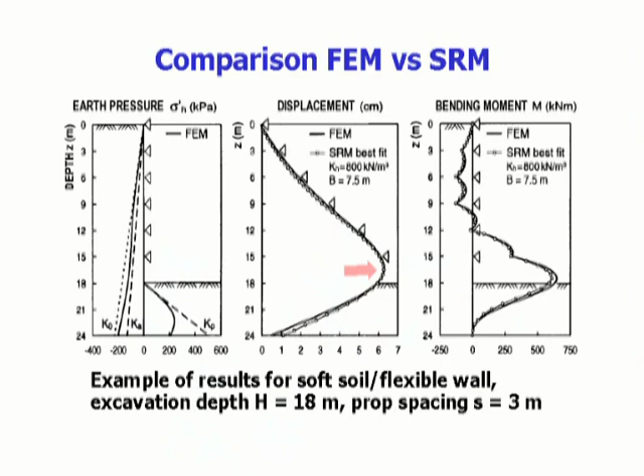This is an example of the comparisons of the results we obtained. This case refers to the combination soft soil, flexible wall, an excavation depth of 18 meters and a prop spacing of 3 meters. We compared the results obtained by Plaxis and by the spring model. The spring calculations were repeated until we had the best match with the Plaxis result. Here the matching, both in terms of displacement and bending moments, is very good. So we could derive the best fit coefficient of subgrade reaction. Of course, these values varied for the different cases considered.

So what we found, as expected, is that the coefficient of subgrade reaction decreases when wall deformations increase due to an increase of excavation depth or a decrease in restraint degree. Therefore, this corresponds to an increase in B, the characteristic length, that is the width of the soil zone involved by wall movements. We represented this by a relation between the coefficient of subgrade reaction and the constrained modulus MDMT, similar to existing formulations for the coefficient of subgrade reaction.

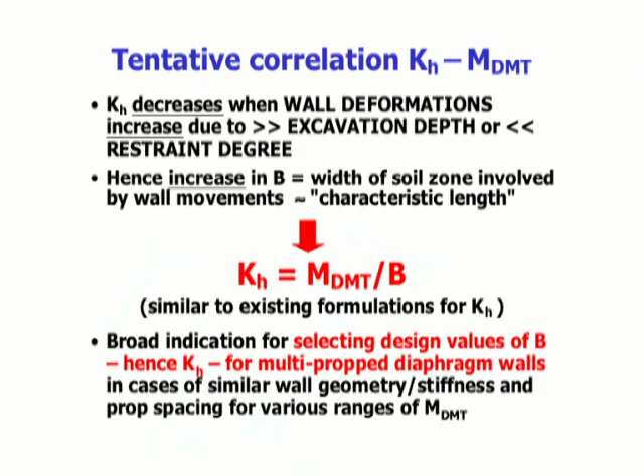We think this relation can be used as a broad indication for selecting design values of B, and so of the coefficient of subgrade reaction, for multi-propped diaphragm walls in cases similar in wall geometry, stiffness and prop spacing, and for various ranges of soil stiffness, to those analyzed in this paper. This relation has been expressed as charts in the next slides. From this figure, we can obtain the B value to introduce into this formula to derive the coefficient of subgrade reaction as a function of excavation depth for two values of prop spacing, or in between, and for different ranges of soil stiffness.